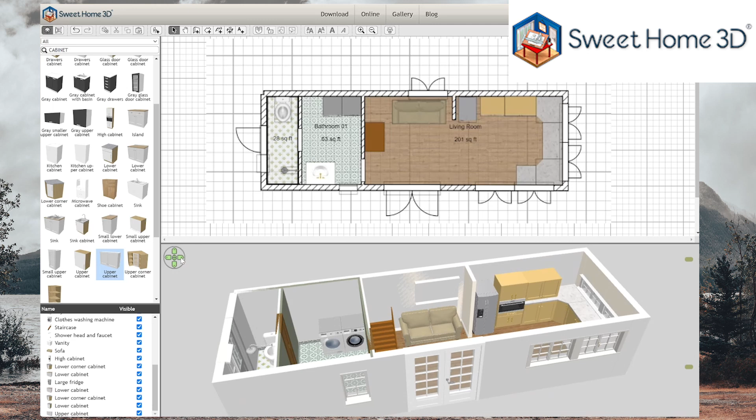Which free floor planner is the best for your real-life projects, and how do they compare to professional design software? On stream, we've been testing a multitude of free planners to find this out. This time, we deep dive into RoomSketcher.

Stay tuned. Hey guys, my name's Angorabuilds. I'm an architectural technologist based out of Western Canada, and I model buildings in 3D for a living. I also stream about home design on Twitch and YouTube. For the past couple of months, I've been testing out free floor planners on stream with my community, just to see which one would be the best for any real-life projects.

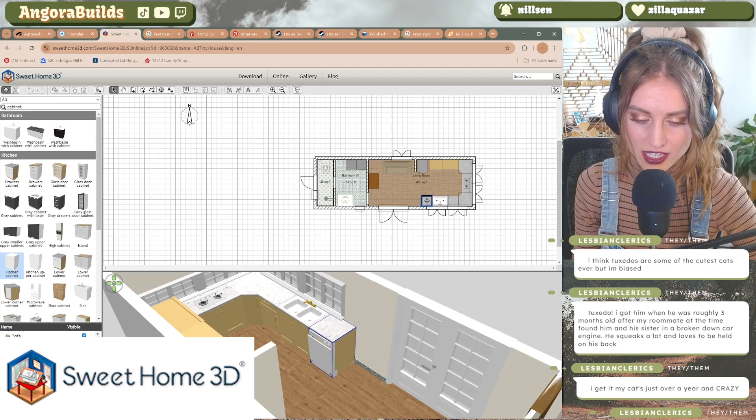Today, we're testing out RoomSketcher. So to give you a little bit of a refresher about how we are doing this, we are testing all of the free planners against each other using the same tiny house floor plan, just so that it's a fair comparison. The tiny house is small, so we can build it quick, and it is my own design, so I know it super well. It also has some unique space-saving design strategies that I thought would be really interesting to test out with the free planners, just to see which ones could pull them off.

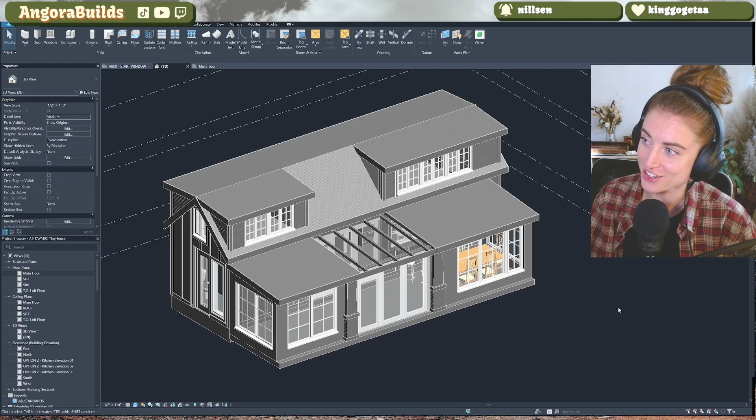This is Autodesk Revit. The cool thing about this tiny house design that I would love to build one day, because I think this is so genius, you can stand up in the loft. We've drawn inspiration from a tiny home builder based out of New Zealand named Shay's Tiny Homes, and she is the first one that I've seen use this strategy where on the second story, rather than having it kind of full loft height at the 7-foot mark or whatever, you lower the corridor in the sides of the house where you don't need full height headroom.

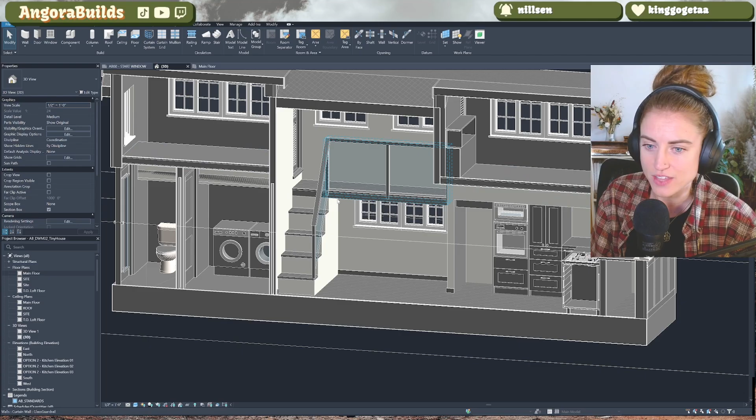So we can put a sofa under here. In the kitchen, it's all kind of built in with the millwork. Same with, you can see it actually continues around, and it just creates, I think, an upstairs that feels a little bit more like a conventional house rather than a loft or like a tree house or something. I could do this solution no problem in my software. Can we do this in any of the other floor planners?

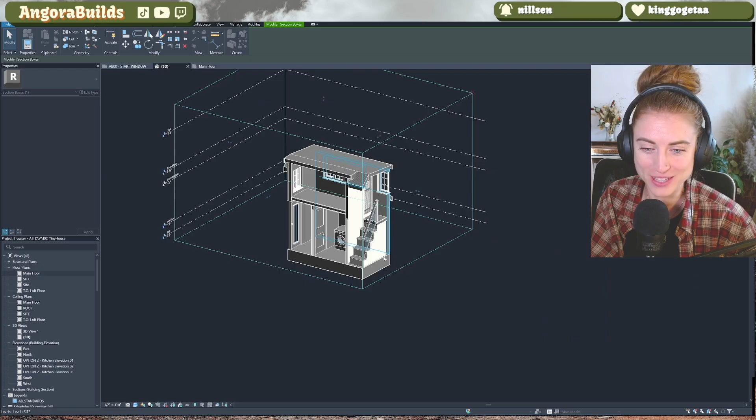Now we're assessing the planners against my software, Autodesk Revit. I use it for work every day. It's like breathing to me. And we're comparing them on 5 separate categories: 1, accessibility. 2, the learning curve. 3, customization. 4, accuracy, and 5, the design to construction workflow.

If you want an elaboration on these categories and the logic behind them, or a more in-depth explanation, I do that in my floorplanner.com video. But for now, let's just jump into RoomSketcher.

So unlike other floor planners that we've reviewed so far, RoomSketcher actually isn't a web-based software, but rather an app that you download to your PC or your tablet. It is free to use, but like everything we've reviewed, there is a pro version for an additional cost. The pro version is about $12 a month if you pay annually, or $24 a month if you want to do month by month. I believe that's in USD.

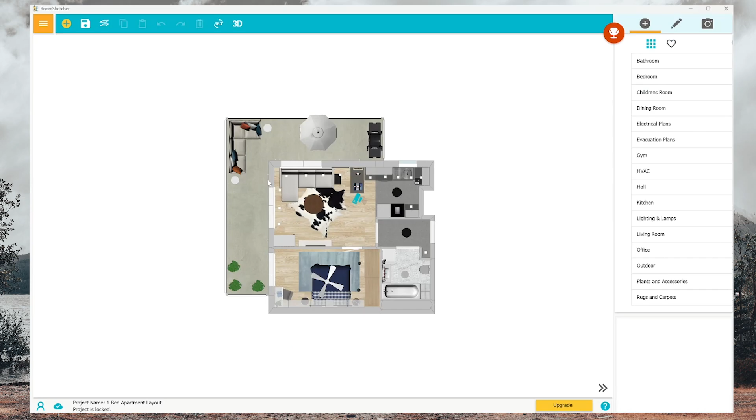They market themselves as a floor plan and home design software whose edge is its intuitive nature and ease of use, while still maintaining powerful 3D visualization capabilities. It was originally developed in 2007 under the name Vizino Home Designer. And before it was that, it actually stemmed off of another company that specialized in 3D visualization of the underwater of large oil rigs. All of the 3D development was adapted from whatever that software was.

It rebranded to the name RoomSketcher back in 2011 and has amassed quite a large user base of about 5 million users and 7 million projects created to date. It does appear that the largest demographic for RoomSketcher is real estate agents, real estate photographers, home and interior designers, as well as appraisers. This kind of tells me right off the bat that it is probably more of a 3D visualization and designing tool rather than a design to construction tool. But they aren't really marketing themselves as a construction drawing software, so I'm not really that fussed about it.

Now, according to their website, RoomSketcher does say they offer a ton of features, and you can scroll through a massive list on that page. I just kind of want to point out that a lot of these features do seem redundant, like saying that you can draw floor plans or create 2D floor plans or generate 3D snapshots or 3D photos.

Those items are basically the same thing. And I kind of think that RoomSketcher is overcomplicating its stated capabilities. At its core, it appears that it offers 2D and 3D floor plans, isometric views, interior snapshots or renders, and 3D walkthroughs. Now, for any planner that is generating 3D geometry while you are building in it, these feature offerings are kind of par for the course.

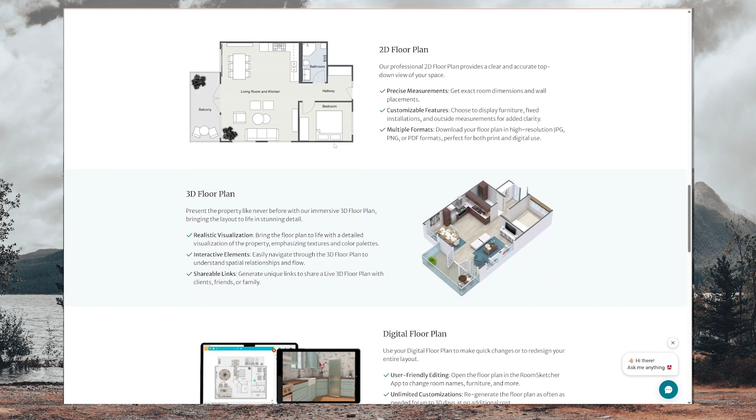The only feature that does seem a bit unique is its ordering floor plans feature, which I think is you sending RoomSketcher your napkin sketch of floor plans, and then they will create a RoomSketcher project for you, which you can then manipulate in 3D and work in. Now, this feature does seem enticing if you are a real estate agent or a real estate photographer and you don't intend to do any design off of it. You just want the plans to communicate what's there.

But if you are using RoomSketcher with the purpose of design or a renovation project, I would actually strongly advise that you just set up the floor plans yourself in the 3D software so that you get a better idea of how to actually navigate the interface and learn how to use it and know what you're doing. That's just my thoughts on that.

Now let's get building. I need to make a brief disclaimer before we get going too deep that I am using the free version of RoomSketcher and I'm not using the pro version. There's a lot of features in the pro version that I don't have access to, and I'm not able to speak on the capabilities of those because I don't have a free trial.

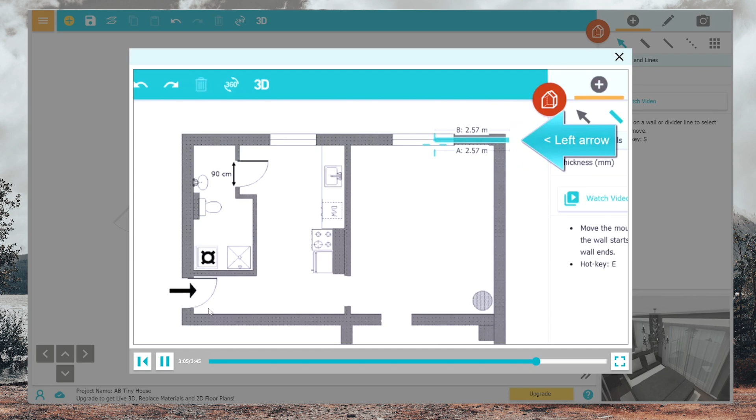They also have these shorter, more one-off tutorial videos that teach you how to use specific features you're currently hovering on before you use it, and it will autoplay directly in the app. It doesn't send you to YouTube or another platform, and makes learning how to use RoomSketcher really nice and easy. I'll give you a brief introduction to the interface before we dive into building so you understand what we're doing.

This guy here is more of the settings tab. We have options for your project. If you want to start a new one, open an existing one. These are kind of your general project settings with things that are happening more in the overall. There's also a blueprint option here, but it does require the pro subscription. A lot of these features I don't have access to because I don't have the pro version. This is the level toggle.

Here on the right side is where you actually get all of your build tools. I really like this. It's quite clean. Right now we're in the walls tab, but there's a windows, materials, and furniture or objects tab. The bulk of what you do in RoomSketcher will be kind of in this window here. You navigate through them here and you'll get different options. For objects, for example, we have different rooms that you can jump between to find items. You can like items, you can search for items.

The one that's not super intuitive is there's a wall tab, but there's the windows and etc. tab. This is where the symbols and texts live, as well as like different measurement things. It isn't really the most intuitive. When I'm working in Revit, for example, and I have my own real life projects, these symbols and texts, as well as measurement capability, it's in an annotations tab, which is basically its own special tab. 3D model geometry is in one place and then annotating is in another place, and they're very separate features. Having it embedded like this, I feel, is a little bit confusing. But generally speaking, this interface is really fast to wrap your head around.

Okay, so we'll start a new project. Okay, well, we're doing a blank project. It didn't really ask me to name anything. Level, new, properties. Well, we're on level 1, so we'll stick with that.

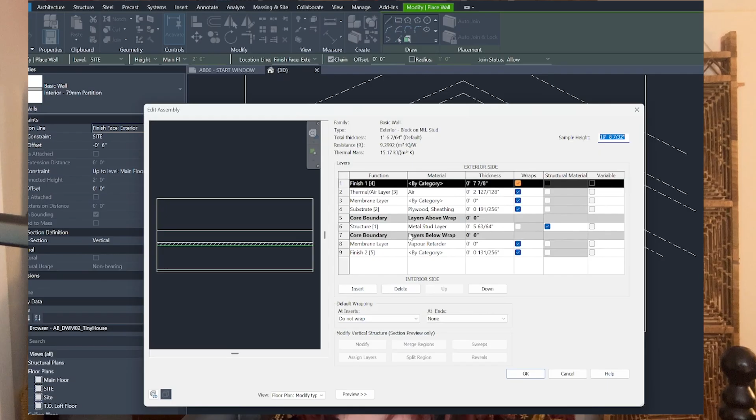Oh, you could just draw a shape. I'm going to delete this. I'm just going to draw a rectangle. When I build walls in Autodesk Revit, I can actually input the assembly, like drywall, studs, sheathing, siding. I can input that information and it'll automatically bump out to the thickness that I want. Whereas in RoomSketcher, you can manually enter the wall thickness if you know it, but you might have to do a little side calculating first to get that number.

I was pretty frustrated about not being able to enter in the dimensions that I wanted. Can I type a measurement? No, I have to just manually drag it. If you click on a wall that's already within a room, you can change the length of it.

That being said, in Autodesk Revit, when I'm placing walls, I can just type a dimension and place it down. I find that workflow much quicker and more intuitive, when you can draw them at the initial correct lengths from the start, as opposed to roughly modeling the floor plan walls and then modifying it after the fact. I always find that more difficult. Modifying it after kind of turns it more into a puzzle. Not my favorite feature regarding the walls.

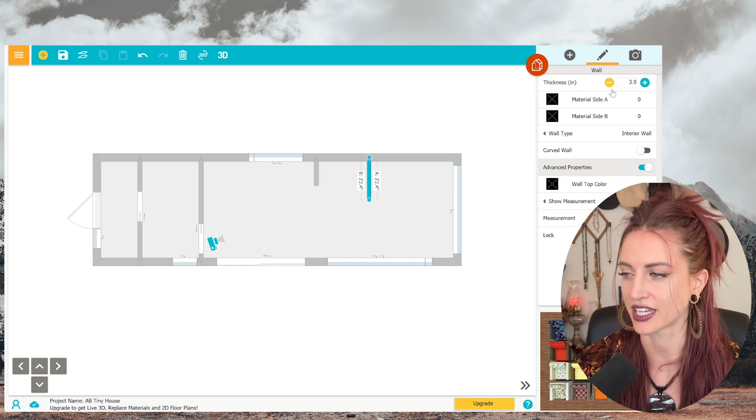The other thing I noticed is if I'm doing an interior wall and I wanted to do a half height wall, I can adjust the thickness and the materials, but I can't modify the height of it. It isn't necessarily a wall setting, it's more in the level properties where you modify the wall height. I assume that's just where the level datum line is, and that's how it adjusts the ceiling heights too. Let's try adding a second level and see what happens.

Wait, this is cool, we haven't been able to actually draw the lines or walls for the second level in a design yet, so I'll keep the envelope here, interior, there we go. So then we toggle back to level 1. Nice. But we were able to get all of our walls in, at the thicknesses we wanted, and we were able to add a second level. This is the first planner I've been able to do that with without buying the Pro version, which I love, and it's great. All right, let's do some windows and doors.

Despite it being the free version of RoomSketcher, the library options are quite impressive. Want more products? Upgrade to Pro, obviously.

Where I run into issues with RoomSketcher specifically takes us back to how you cannot use real-time 3D viewing to see what's going on with what you're placing. And what does that look like in 3D? Oh, can we not access a 3D isometric? So you could only do this in 2D. I gotta upgrade, that sucks.

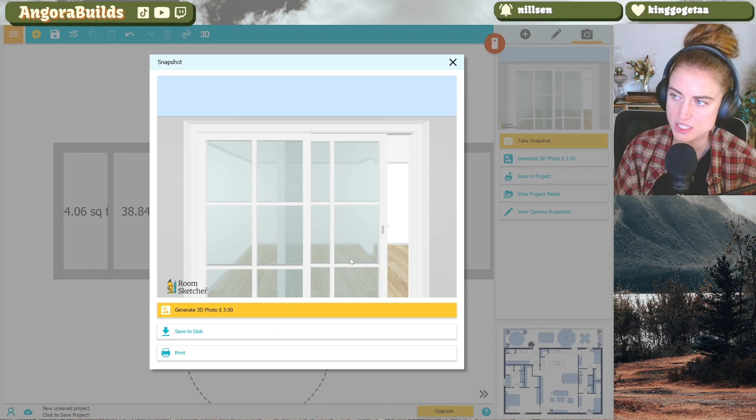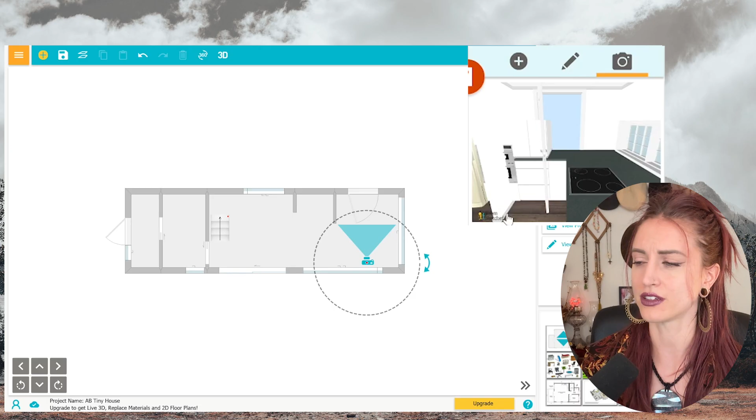Well, okay, field of view. Oh wait, so I can take snapshots and look at it. So it's not all for naught, but holy heck is this tedious if you want to get any 3D coordination out of this. It really sucks having to use this little camera tool to constantly update the snapshot to see what you're doing in 3D or what you want to see. Every time you take a snapshot, it does the loading wheel and you have to sit there and wait for it. And when you look in the snapshot, you can't pan around or move it from the direction it's already in. If I wanted to look more to the left, I have to take another snapshot.

But to take it back to the windows and doors. And how do you place this? Oh, you just drag it. So we have 2 pocket doors, and it looks like they come in predetermined sizes already. What does this do? Oh, but you can drag the size of it yourself.

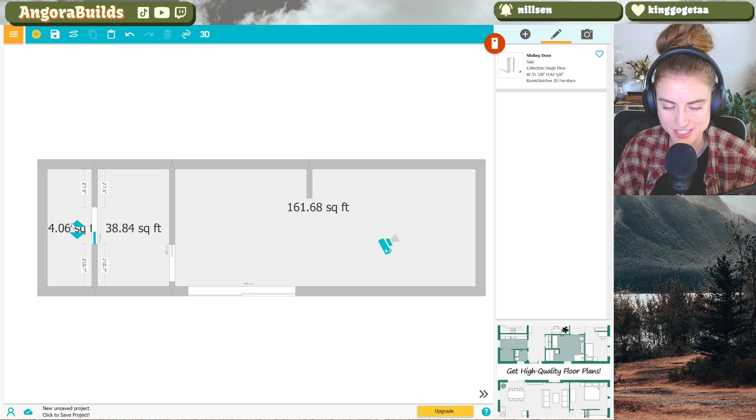You can adjust the width and the height. It's a pretty fun and quick way to place these things down, and center. It doesn't really hold your hand on this at all. How do I change the swing of it? Kind of just seems like you have to move it in the right way.

All of these material customizations are behind the paywall. I can't change the door material without having Pro, which is also quite unfortunate to see.

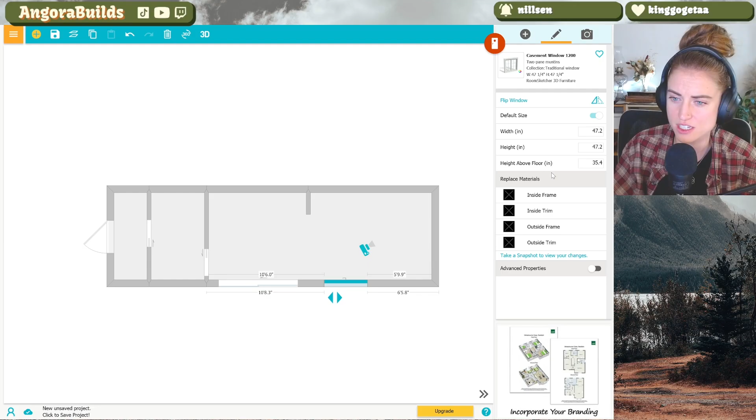And windows, so we have a lot of windows. Look at all these windows. I'm just gonna pick one of these randomly and then just change the width of it this way because it seems easier to me than just trying to read the measurements on them.

There's some questionable icons. I'm not sure what these little symbols mean. Is this supposed to be on the inside? I don't know what this little symbol's depicting, if they're supposed to be opening latches, if you want those on the interior or if you want them on the exterior. I was never quite able to figure that out.

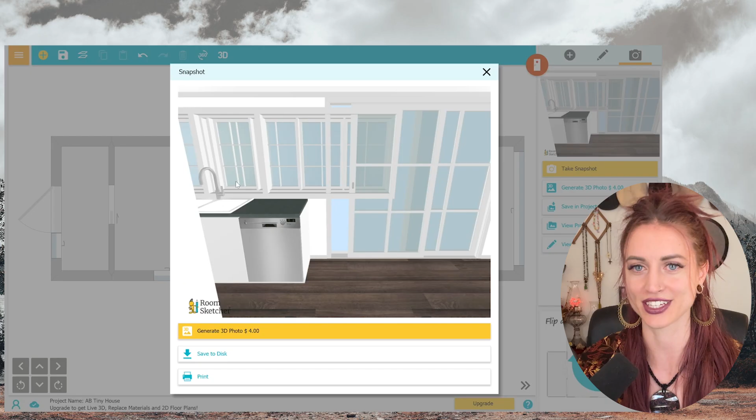The planner doesn't stop me from overlapping geometry though, and it doesn't really call it out as an error or anything either. It just looks kind of weird when you take a snapshot and you see everything overlaid onto itself. Like what the heck is going on here? As long as you're mindful of that and you know not to do it, Gucci.

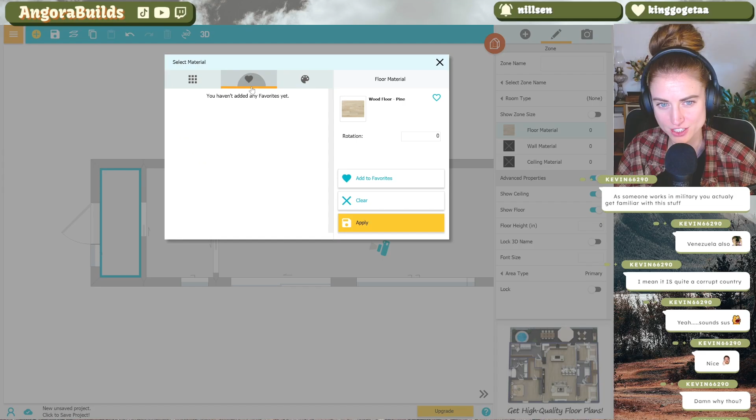Now, while the library for doors and windows did seem quite expansive and nice, the library for interior finishes seems a little bit trickier. It's really big. There's 1,100 options here that you can see, but they don't really have a good filtering system if I just wanted to look at woods or if I just wanted to look at tiles. You kind of have to type it in and let it do the filtering for you. It would just kind of be nice if they had a tab for it.

Apply. So now if I go back to materials, there we go. You can't upload your own materials, which is a bit unfortunate if you were trying to do a design project and wanted to see what real finishes would look like together.

And the only customization that you can do is just the rotation. From a schematic design perspective, I would say this is enough to get by. You can use it as a way to play around with vibes or palettes and see what tones of things look like together. But it is a little tricky when you get granular with interior design, because sometimes the hues of a white swatch, for example, whether they're warm tone or cool tone, can really make or break how a space feels.

Now, I've talked about the design stages in the past. I'm starting to get the vibe that this is more of a schematic design planner at this point. Oh yeah, and then the other thing you can do, I'm pretty sure, is you can click on the walls and then pick the color.

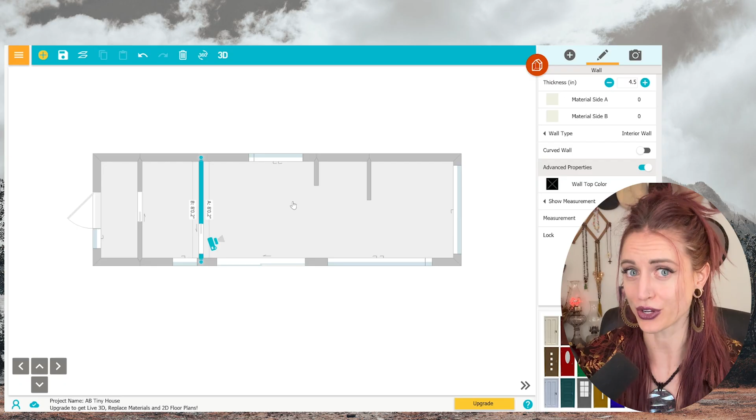When it comes to placing wall finishes, it does use the side A, side B. The other thing that's really nice about RoomSketcher is that it actually labels the side A and side B for you. I love that it does this. I do like the side A, side B wall finish placing feature. I actually prefer the way that RoomSketcher offers to do it as opposed to how I do it in my software.

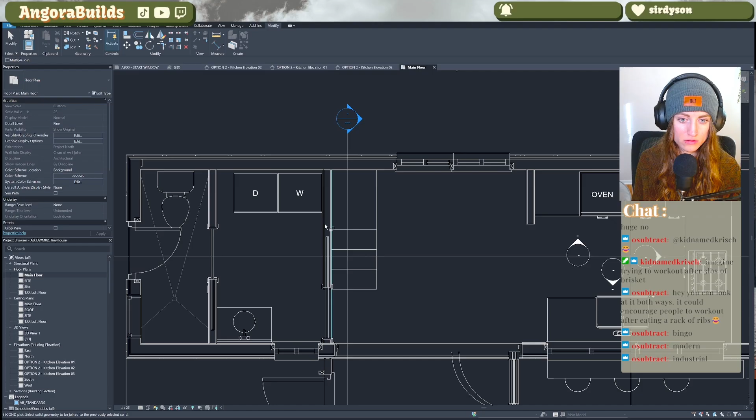Placing interior finishes in Revit is actually quite tedious, and I feel like there's a lot of differing opinions on the best way to do it. In Autodesk Revit, the best workflow that I've found is actually creating a wall finish wall type, making it like 3 millimeters thick, and then manually modeling it, just because oftentimes you'll need areas of things, or when you get into 3D rendering softwares like Twinmotion or Enscape, it just makes the workflow, when it's its own standalone little wall, a lot easier to work in.

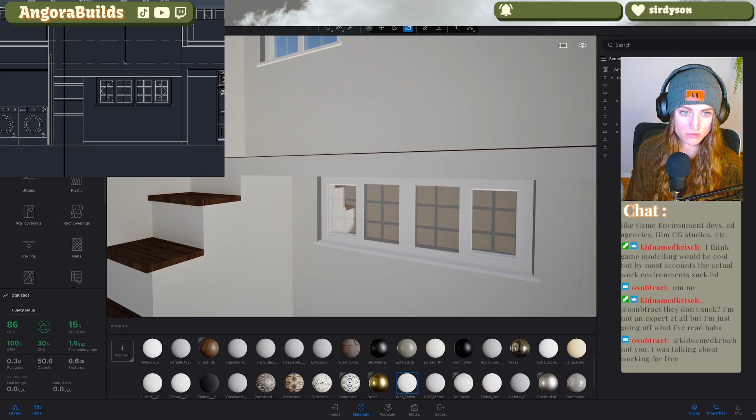It's the exact same for floor finish as well too. I will actually manually model a little floor finish, especially because they usually have a thickness anyway. I use things like filters or work sets, which is kind of like setting layers, to put it simply, to filter it out in different views.

The cool thing about RoomSketcher is it does seem that based off of what you're working in, when I'm in wall mode here, it's just showing the walls. When we toggle into the materials, it turns the materials on for you.

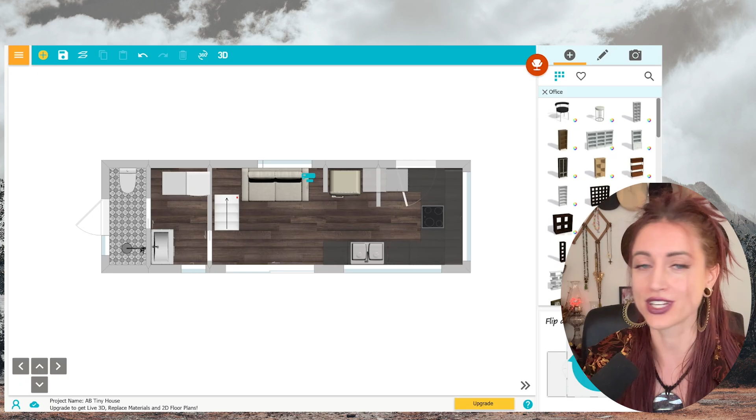And when we toggle into furniture items, it turns on the furniture for you. It's kind of cool that it filters it automatically. It gave me a heart attack at first though, because I didn't realize that's what it was doing, and I thought I had lost all my geometry. But once I realized that's how it was doing things, I thought it was really nice, just focusing on the components I wanted to focus on.

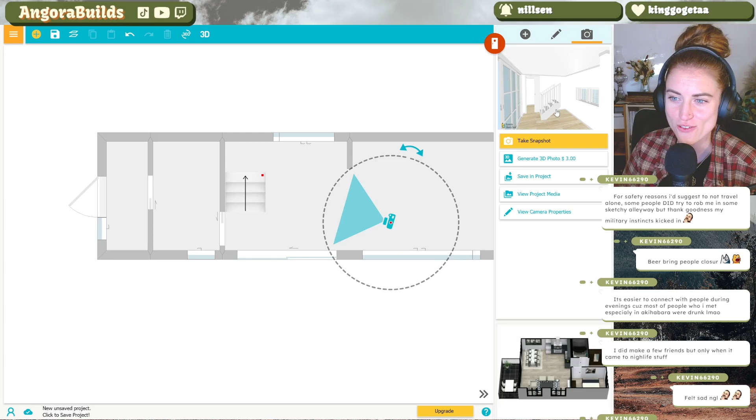Well, let's try stairs. 1, 2, 3... I'm pretty sure it's just 4, and then you're on the platform. So far we have not been able to modify the number of stairs anywhere, you just drop it in. Here, there's one that has 4 stairs. So we could do this. Back to the snapshot. Oh wait, we do have little stairs. I wonder if we can change the heights of them. Hold on, let's try. We can!

Oh, and you can turn off the left railing and just show the right railing. I like this, I'm happy. Can we pick what kind of railing this looks like? Look at how tall it is, it looks like we have a slat wall thing going. Maybe I'll just turn the railing off. So yeah, this is the first time we've been able to do stairs, that's awesome.

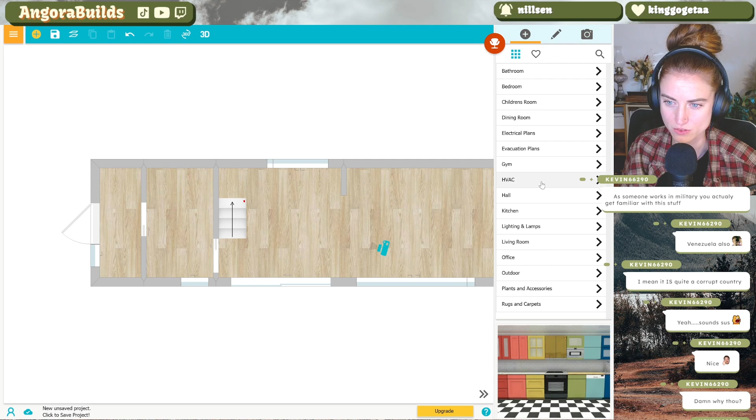When it comes to object placement under the furniture tab, it is very similar to how you place doors and windows. You also get similar parameters that you can modify, like the width, depth, and height of things like furniture, sofas, the fridge. You can even modify for objects the height above floor, which is really great to see.

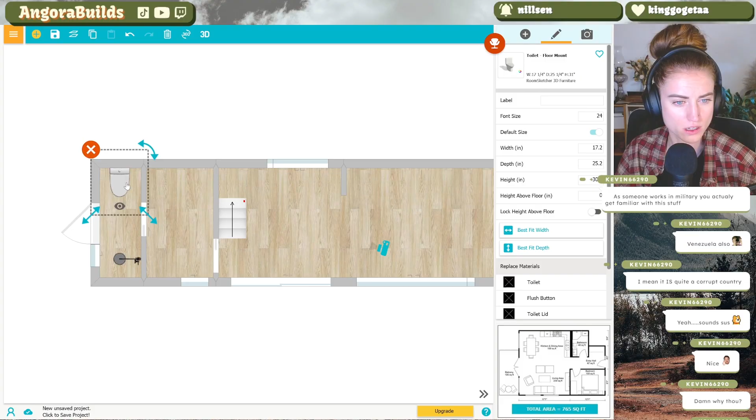Now, the one thing that's nice with RoomSketcher as opposed to Autodesk Revit is whenever I want to place objects, components, geometry, I often have to source it from the internet, a website like BIM Object, or make it myself in 3D and save it to my own Revit library. Usually I choose the latter because I want my 3D objects to be clean and look a certain way. With Revit, you can import 3D objects that have a lot of extra information that might not necessarily be beneficial to me from the architecture or interior design side, that manufacturers care about.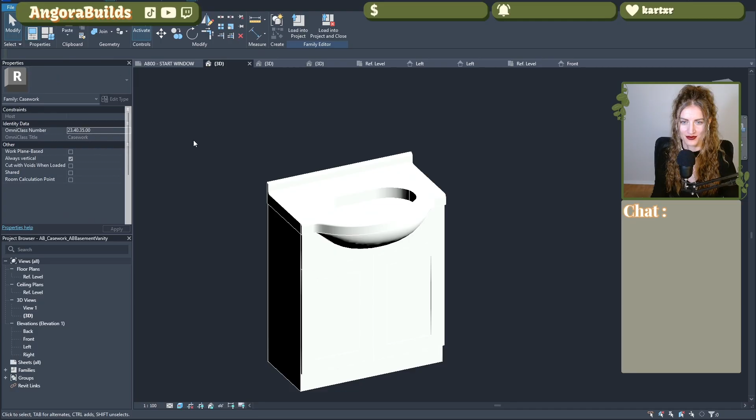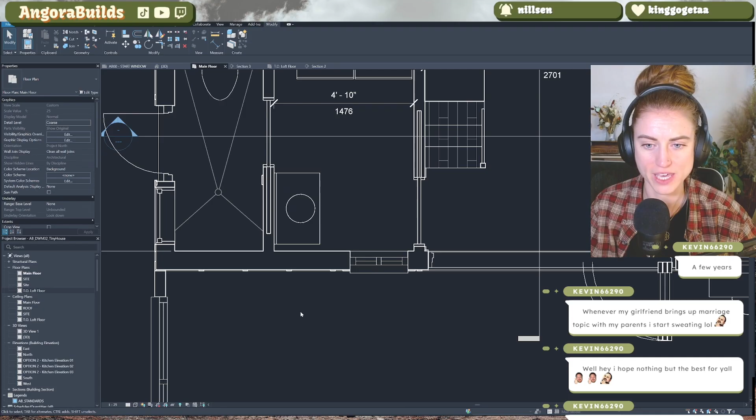So when it comes to just wanting to configure a space and see how different things fit or how they're put together, Roomsketcher is much quicker on that front. It even helped me figure out an adjustment I could make to the vanity in my first level bathroom. This is kind of nice actually compared to how I had it before. Like in Revit we just put it here, so just go here instead. Oh yeah, we totally have way more space. This is nicer, okay, we made a good design change from this.

Thank you, Roomsketcher. Oh, can you not replace the materials on the components like this unless you... oh, you can't do it unless you pay. Same with the toilet? Okay. Library's good, potential customization is good if you have Pro. I just wish I had 3D panning, guys, it's so hard to do this in 2D and then 3D snapshot everything.

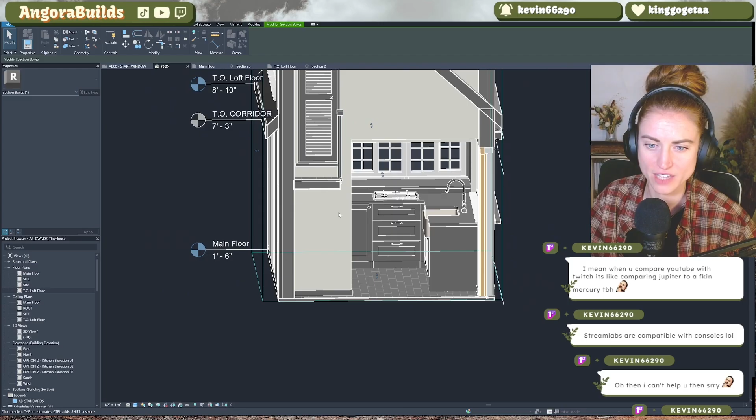Oh my god, okay, let's take a crack at these cabinets, because this has kind of been the make or break for the customization of these floor planners every time. Okay, here is the kitchen. This back wall here is all full height stuff, and then we have the stove kind of in the middle here with the drawers, then the corner cabinet, and then the sink on this one.

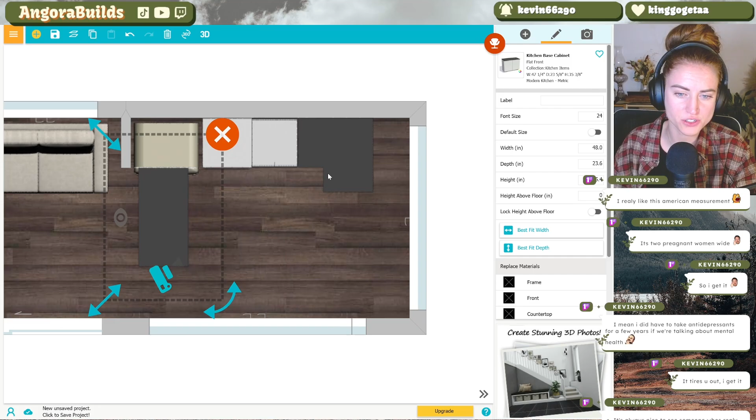So Roomsketcher does have one of my favorite ways to model cabinets. They have a general cabinet library, and then you modify the finishes of the cabinets after the fact. This is my preferred way to do it. Some other planners have the finishes embedded in the cabinets, which makes it a little harder to work in. But of course the cabinet color customization is behind the Pro paywall, so we weren't able to actually modify what the kitchen looked like beyond just white boxes, which is really unfortunate for the free planner version. It's also a little tricky with the cabinets because you're just scrolling through a giant library and there aren't really many filters beyond just kitchen as the components you're going through.

If I search upper cabinet, it just says no elements found. It doesn't really seem to filter or use the search function for cabinet types very eloquently. Fortunately, there were a lot of different kinds of cabinet blocks, so I think we were able to depict every

kind of cabinet block that we had in our Revit model. But another tricky part with this kind of sketchy, almost cartoony interface, it was really difficult to make sense of adequate sizing. This is kind of weird because it doesn't really snap to anything. You're kind of just eyeballing this.

Now, while I was actually building out the cabinets, I didn't notice this best fit width or best fit depth feature, but oh my God, I love it. I haven't seen it in another planner yet, but I think that this is amazing when you're trying to figure out how to make things the right size.

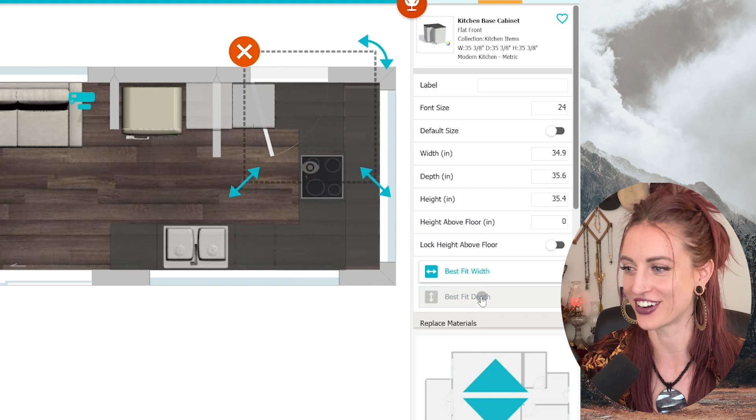It is kind of weird though when you zoom in, because you can kind of see the floor finish sticking out between the cabinets. Oh yeah, and you can see a gap here. But I don't mind the gap because it makes it more distinct where the doors and drawers are, and the countertop still looks continuous, so that's good.

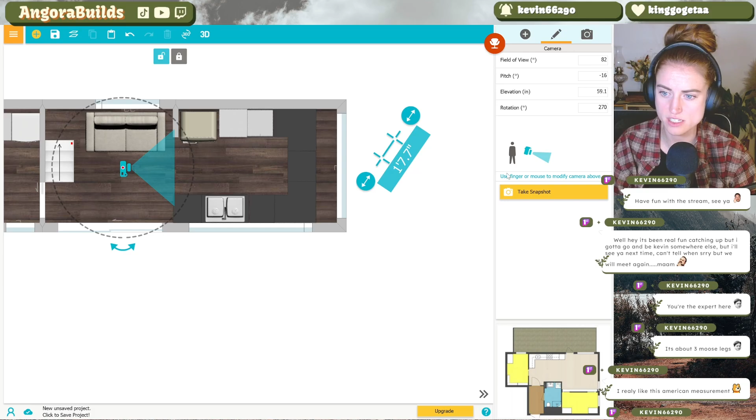Overall, the cabinet customization isn't terrible. You can't really do anything like hardware pulls, or when I placed the sink down, I couldn't change the faucet type. So there's some more granular specifics when it comes to home design that you might not quite be able to do in Roomsketcher. But I think if I had the pro version, this would still be one of my more favorite planners for cabinet customization, at least from a schematic design angle.

Okay, so while Roomsketcher does have a really good interface and capabilities for actually creating the 3D geometry, adding the next level above it introduced some intricacies that I just wanted to point out before we're done reviewing this planner for today.

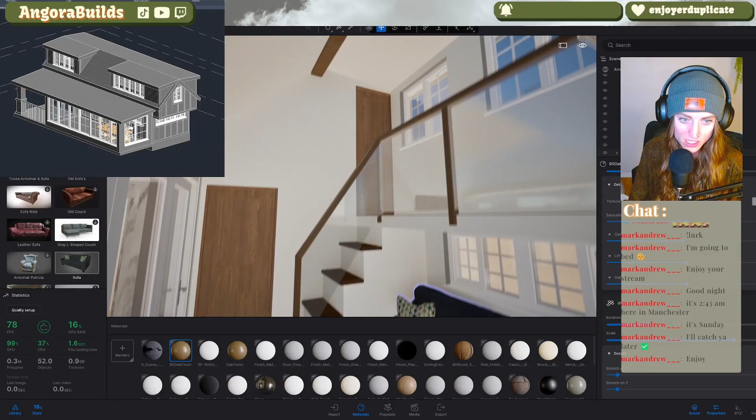The first one being that in our initial home design, we have almost like a mezzanine opening between the first floor and second story that requires an opening in the floor. When I do this in Autodesk Revit, I just modify the floor extents, and if I don't put it all the way, it automatically creates an opening for me. I couldn't figure out how to do it in Roomsketcher, or if there was even the possibility to. If there is, it could potentially be behind the paywall.

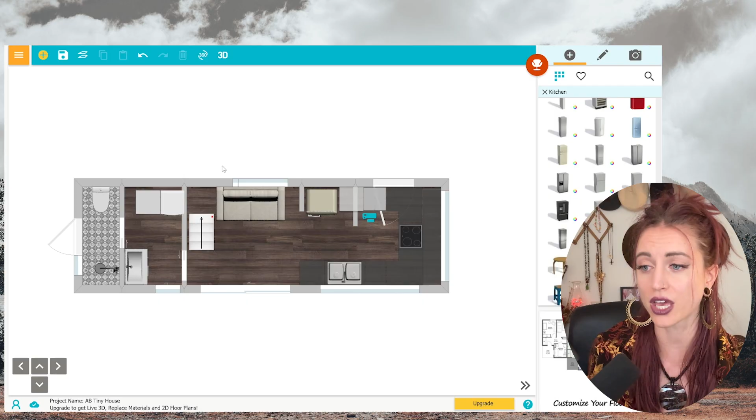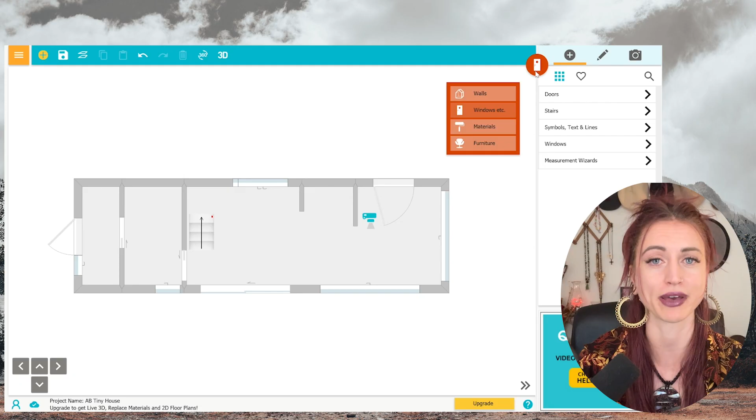The other thing we weren't really able to do was create the dropped floor in that tiered level sense, so that we had the dropped floor corridor and then the second floor above it creating that full height feeling without the tiny house actually being full height. There isn't really an option in the Roomsketcher interface to model floors. It appears they're just automatically generated within the extents of walls. I don't know if we were able to generate bulkheads either.

All that is to say none of the planners have really been able to do this, aside from floorplanner.com, which did allow you to use surfaces to create boxes, but that's, I think, the closest feature I've seen in a free planner to being able to do dropped floors or bulkheads and things of that sort. But because we were able to get so far with Roomsketcher, it's just something I want to point out.

When I'm doing construction documentation or interior renos for contractors to understand what's going on in the space, oftentimes things like bulkheads or varied heights in floors and walls can often get missed if they're not specifically called out in a visual way via elevations or design views or what have you.

Something to think about. Now let's get to rating it.

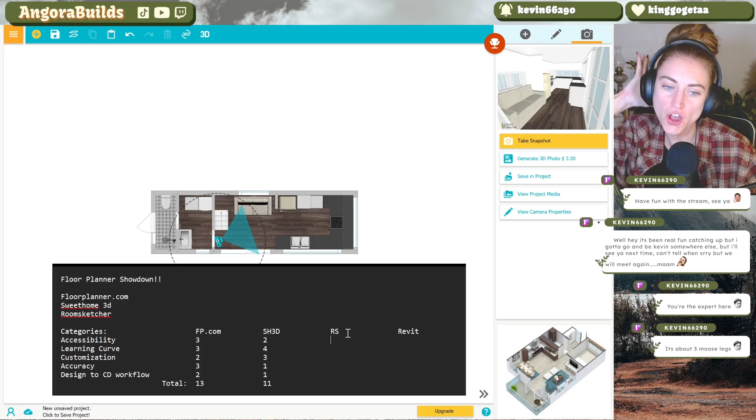Oh, maybe I'll give it a 3. Everything's free, it didn't take up a lot of space, and it was a really quick download. I'll give it a 3.

Learning curve - it actually had a really good learning curve. I thought this was pretty intuitive. This is my favorite one out of the 3 that I've had to navigate around and learn how to use. I'm gonna give it a 4.

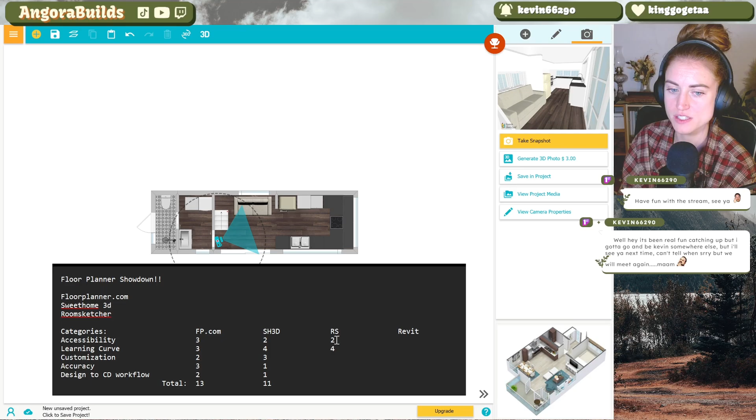Accessibility is gonna be a hard one, because I like the placing of the materials and finishes better, and I like the libraries from what I've seen so far better. But the paywall - that's why I did 2 for Sweet Home 3D. They also had a pretty serious paywall. This is going back down to a 2. I'm actually tempted to give this a 1 for accessibility with the paywalls, because you can't navigate in 3D.

You can only do 2D planning, and now we're going back and forth between our snapshots the whole time. I'm giving it a 2.

Customization for this - I do think this is the best potential for customization that I've seen out of the 3 platforms we've gone through, except it's behind a paywall. I could not change any of the colors of the cabinets or the furniture or anything. Kind of sad to see it. I'm gonna do this as a 2.

It's really good for space planning. I think this is my favorite one that I've reviewed for schematic space planning. So without paying for the pro version, the customization of this is not good, and I'm actually going to say this is a 2 as well.

Accuracy - accuracy is how much the platform or software holds your hand in the design to real life practical implementation of what you're doing. So does it help you with things like door frame sizes, wall thicknesses? Does it flag any concerns with overlapping geometry that you wouldn't be able to do in real life?

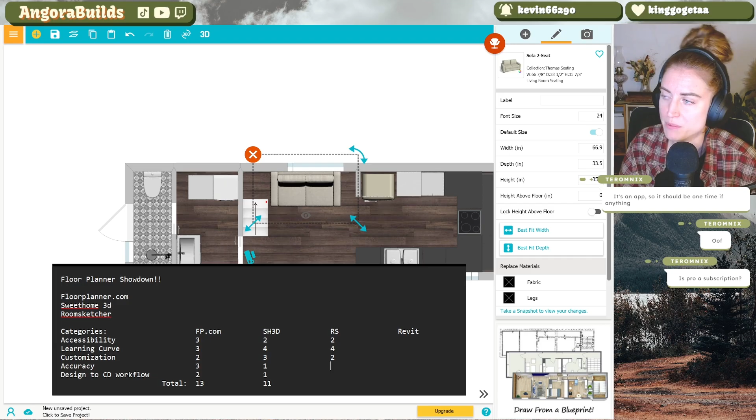IKEA kitchen planner, amazing accuracy. This one's tricky because you can't measure a lot of things very easily or quickly. I'm gonna give this one a 2.

And the design to construction drawing workflow, this one is also trash. I'm giving this a 1. You can't access - I can't do anything with this unless I can get measurements and stuff. All of that is behind the paywall. Right now this is just a really nice schematic planner.

It's good for that, but now to summarize before we finish here today: RoomSketcher is my favorite schematic planner that we've tried so far. I think it has had the most intuitive interface. I think it was the quickest learning curve. The embedded tutorials made it really easy to get the hang of.

There's a few cons from a free planner perspective that I can't get over though, that would inhibit me from using it professionally. The most prominent being the inability to pan around or navigate in real-time 3D. I feel like that was a huge hindrance to our modeling and planning efforts. No material customization of any geometry like windows, doors, furniture or cabinets. That is a deal breaker to me for a free planner.

Great for schematic design, can't take it much further than that, unfortunately. And finally, the precision of it was really difficult to navigate just with how the graphics were. The measuring tool was really difficult to use.

But with RoomSketcher, levels are free, which is great. The libraries for the free version are still quite good, and the interface itself is very clean and responsive. At the end of it all, RoomSketcher is the one I would probably be most inclined to purchase the pro version for to give it a try.